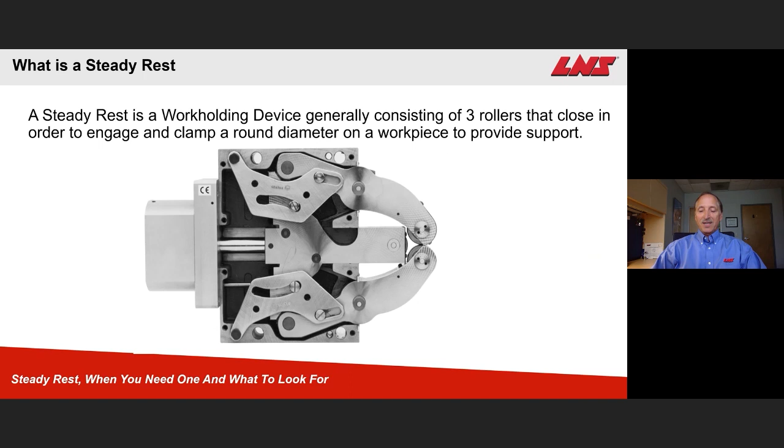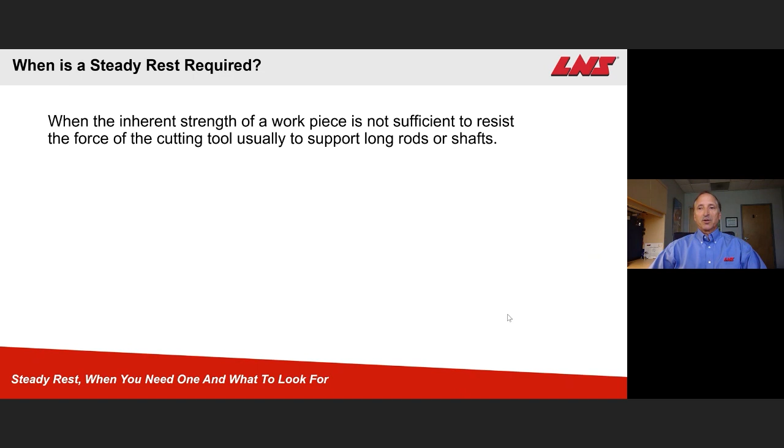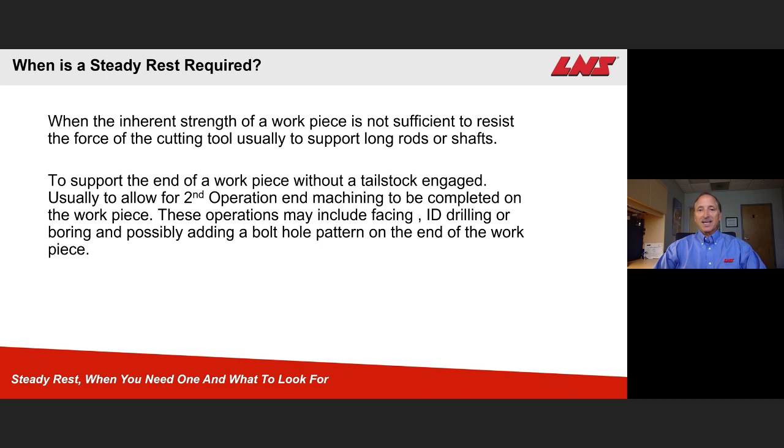When is a steady rest required? When the inherent strength of a workpiece is not sufficient to resist the force of a cutting tool, usually to support long rods or shafts. Also, to support the end of a workpiece without a tailstock engaged, usually to allow for second op machining to be completed on the end of the workpiece. These operations may include facing, drilling, boring, possibly adding a bolt hole pattern on the end of the workpiece.

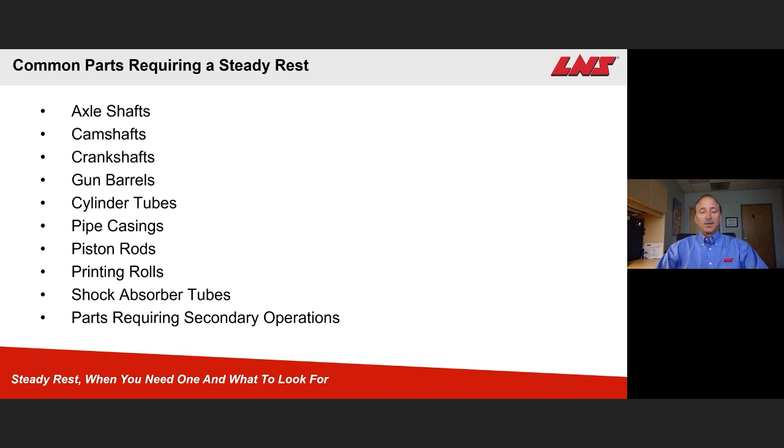Here's some typical common parts that might require a steady rest. Notice a lot of shafts, axle shafts, camshafts, crankshafts, gun barrels, going down the list all the way down to the last item, parts requiring secondary operations.

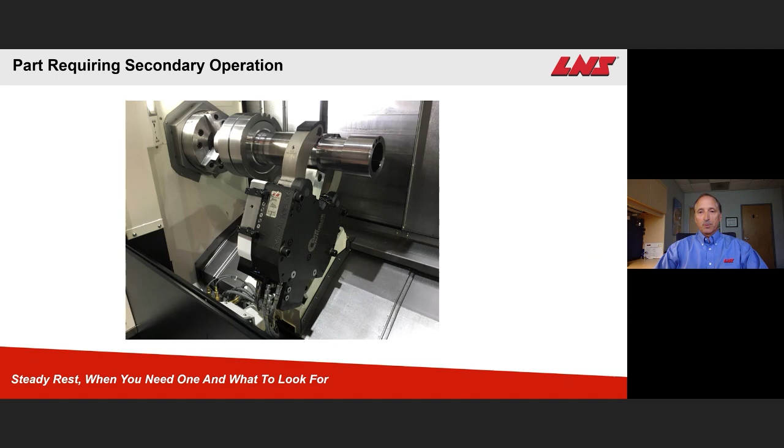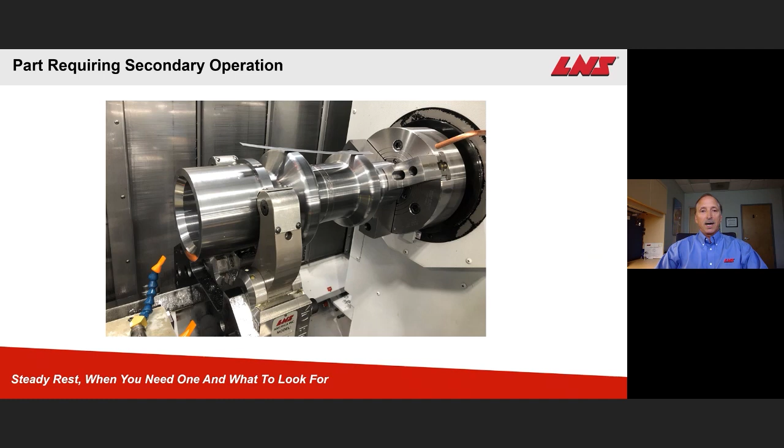Here's a part that might require a secondary operation. If you notice, the part itself is pretty robust and probably does not need a steady rest to do any of the OD turning, assuming that a tailstock was engaged. However, if we disengage the tailstock to do any of the end work, you can see the steady rest would be needed in order to go in and perhaps cut the ID chamfer, maybe do some ID boring or something like that on the end of the part.

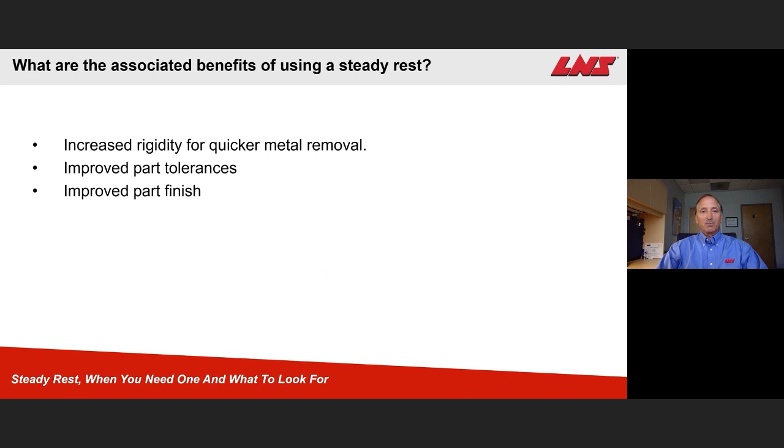Now we'll talk about the associated benefits of using a steady rest: increased rigidity for quicker metal removal, improved part tolerances, improved part finish, increased tool life, and improved operator safety. That is especially true when looking at those parts requiring the secondary operation.

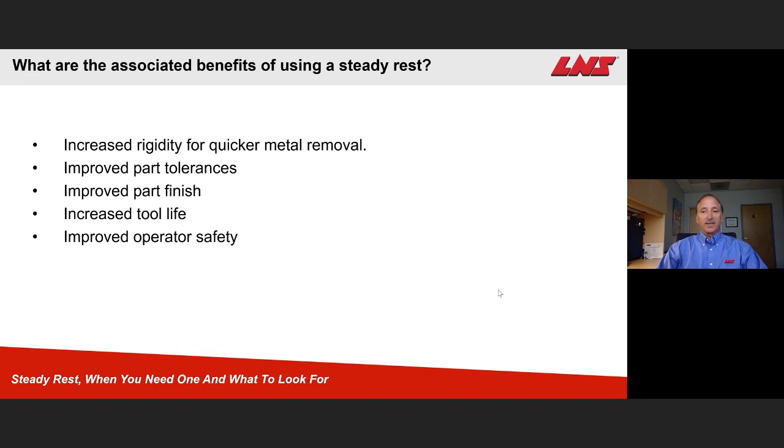So now we want to get in and talk about what types of steady rests are available. First, we'll start with the SLU Series steady rest. Those are multi-purpose for standard applications. They are available in both manual and automatic lubrication models, and we also have the side cylinder B models available for additional clearance.

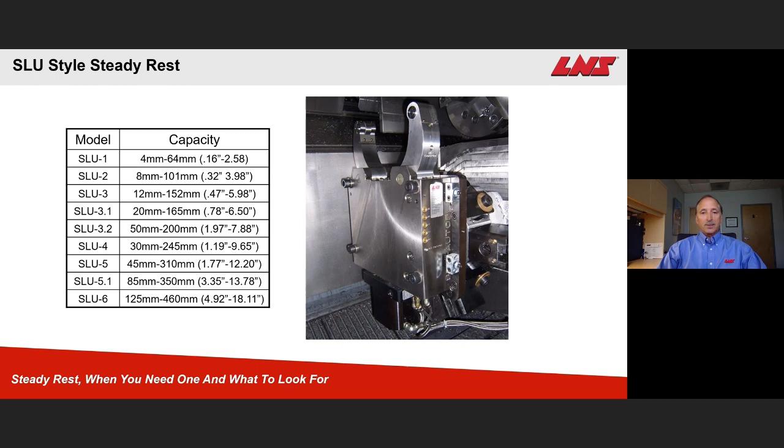Here's a chart that shows our common stock sizes of the steady rest in the SLU series. Notice that the smallest size goes down to about 2.5 inches, and the largest size that we keep as a standard is just over 18. There's a picture of what a standard SLU-Z series might look like.

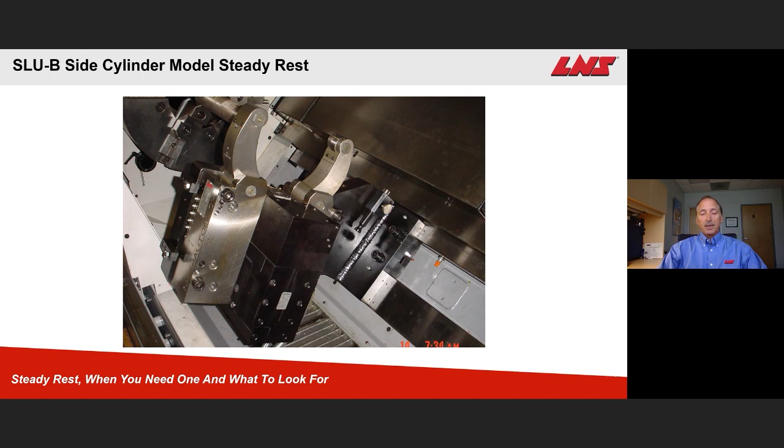And here's a picture of the side cylinder B model that we talked about. Now, if you notice in this picture, the cylinder is mounted on the end of the steady rest. However, in the B model, we take that off of the end and mount it here on the side, with additional linkage going through the body to work the middle arm and the outside arms of the steady rest, which might be necessary. You can see that if the steady rest cylinder was sticking out of the end, we could perhaps have interference with some of the front guarding, maybe even the front door of the machine.

The next model we have is the SR Premium steady rest. The Premium steady rest has the same mounting pattern and capacity as the SLU series. It has a fully sealed body, with coolant wash through the coolant guards at the 3 rollers. It also has hardened arms for greater wear resistance and durability.

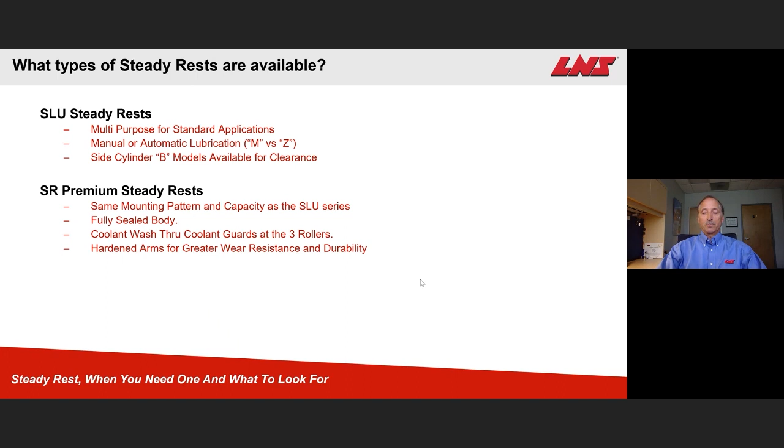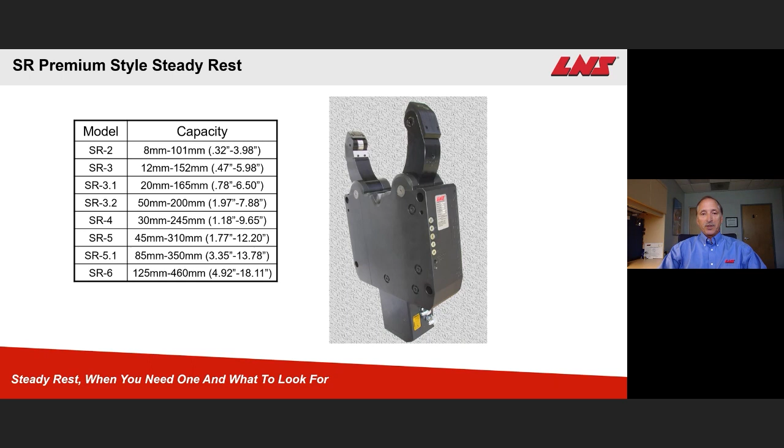Here's a picture of what a standard SR steady rest might look like, along with the different capacity sizes that we offer. Notice that we start in the 2 series — the 1 is a little too small to incorporate some of those features we've added, like the coolant wash especially. Here's another picture of one. The coolant port, by the way, that provides coolant to these coolant guards is in the back of the rest and ported through.

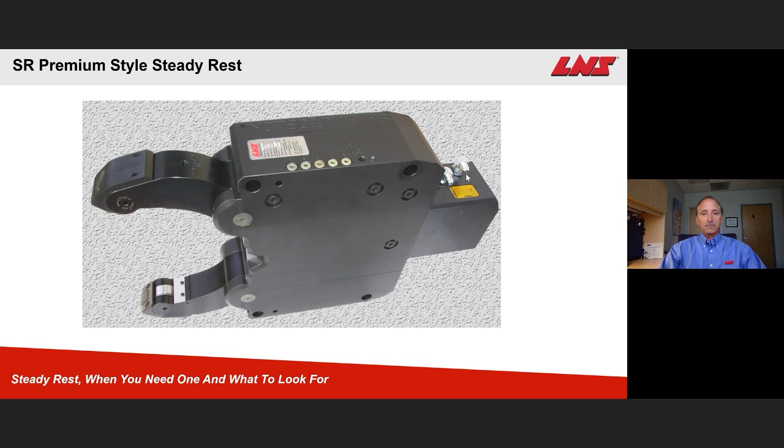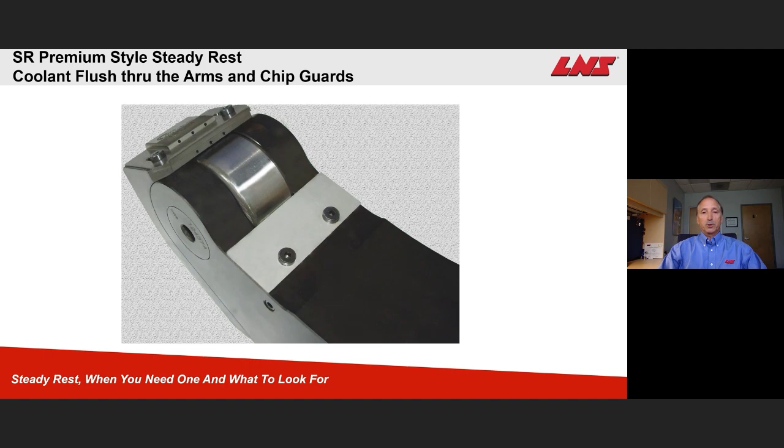This is a picture showing one of the coolant guards, and you can see the holes there. That's where the coolant would come out, the coolant flush. That coolant flush is very valuable for certain applications that have a lot of chips. We can keep those chips, flush them away so they don't go in between the workpiece and the roller of the steady rest.

Moving on, now we go into the K model steady rest. The K model steady rest is a compact design that allows for larger clamping diameter and smaller machine envelopes. It also has the coolant wash through the coolant guards at the 3 rollers.

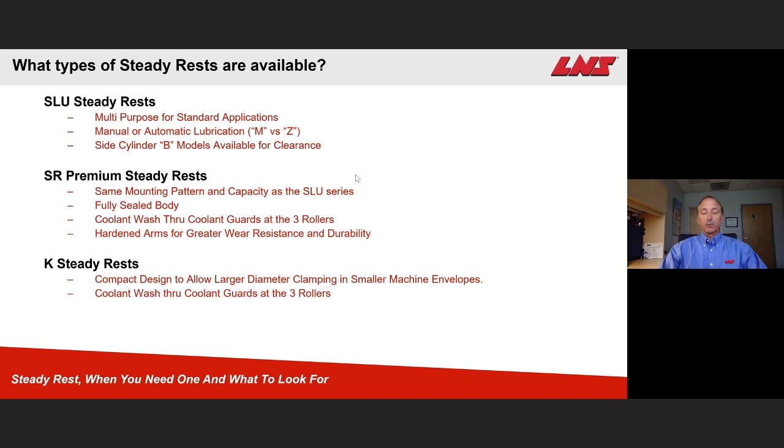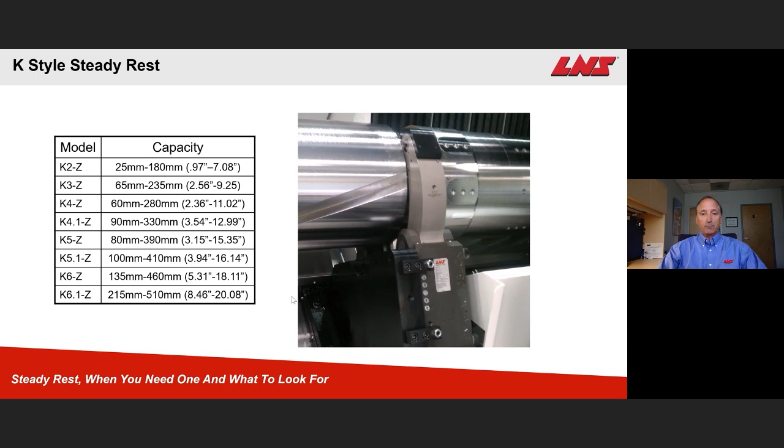And here you can see we start at the K2 series. Notice that even in the 2 series, we're getting up to 7-inch capacity in the K compact model, whereas the K6.1 is getting up over 20 inches of capacity. Again, that's a standard off-the-shelf steady rest. Here's another picture of one.

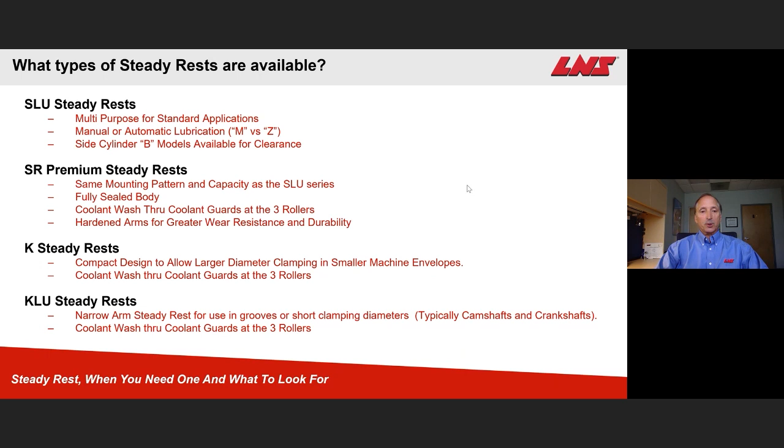So then moving on from the K-rest, we get into the KLU series. The KLU series is a narrow arm steady rest that's for use in clamping in grooves or short clamping diameters, typically camshafts or crankshafts. It also has the coolant wash through the coolant guards at the rollers. Here's a picture of them.

Now, notice you can see that the first 3 series or 3 steady rest options have the same capacity. What's changing is the arm width. Notice that in the model number, the 215, so it's a 2 series, and the 15 reflects the arm width. So we have a 15 and an 18 and a 22 millimeter arm width, all in the same series.

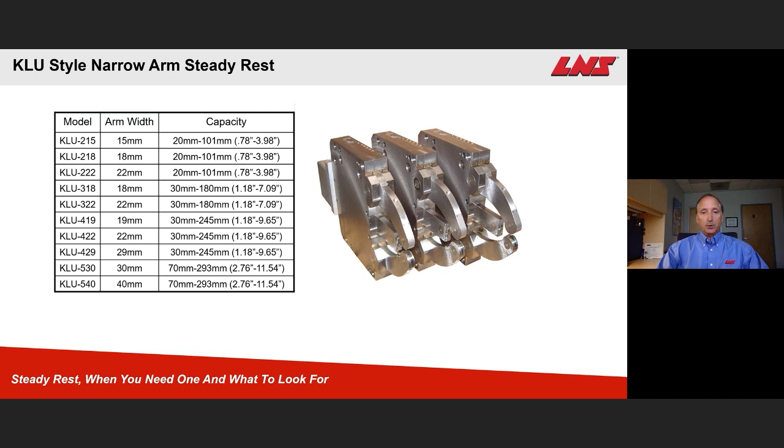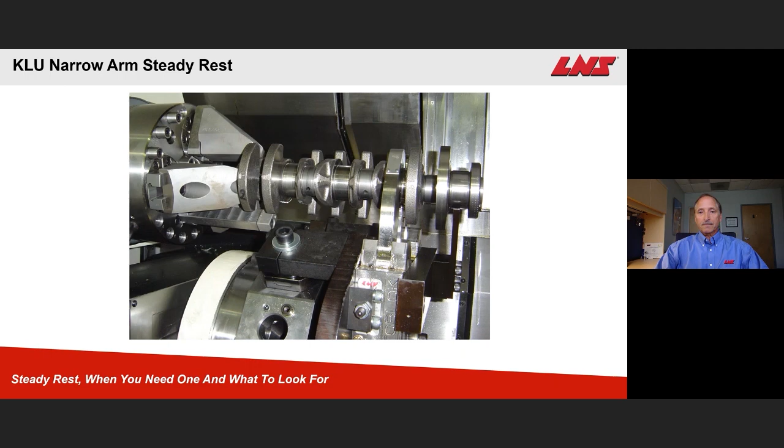The reason for that is we want to maximize the arm width in the groove or clamping area that we have. Obviously, the wider the arm, the more rigid it is. So we want to try to keep as rigid of a steady rest in there as we can. Here's a picture of a typical KLU application. Again, clamping on a crankshaft. Another one, you can see that thin area that we have to locate in.

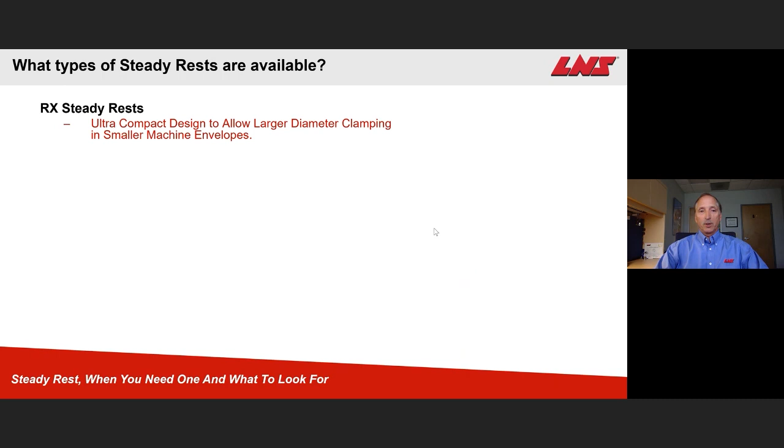So moving on, we get into our RX steady rest models. The RX steady rest is ultra compact in design. It allows for larger clamping diameter in even smaller machine envelopes. It also has the coolant wash through the coolant guards at the 3 rollers. And it is a premium style, so it includes the sealed body construction.

Notice in the RX, we start at the 3 size, and it has the capacity of up over 10 inches. And then we get into our largest model, the RX 6.1, and it goes up to 27 inches.

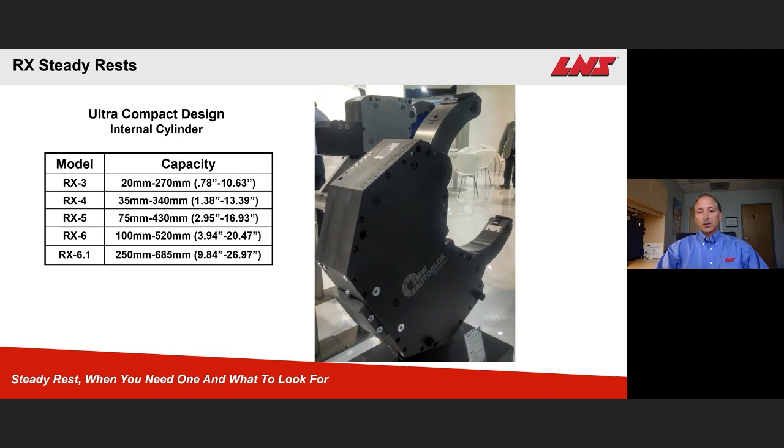Now, one of the ways that we're able to accommodate that inside machine enclosures is, you notice we talked about the cylinder on the end of the other steady rests. In this case, the cylinder is integral to the steady rest. It's actually built into the middle arm, and that's one of the ways that we're able to accommodate such a large capacity. A couple pictures of that. See the arms open up, 27 inches.

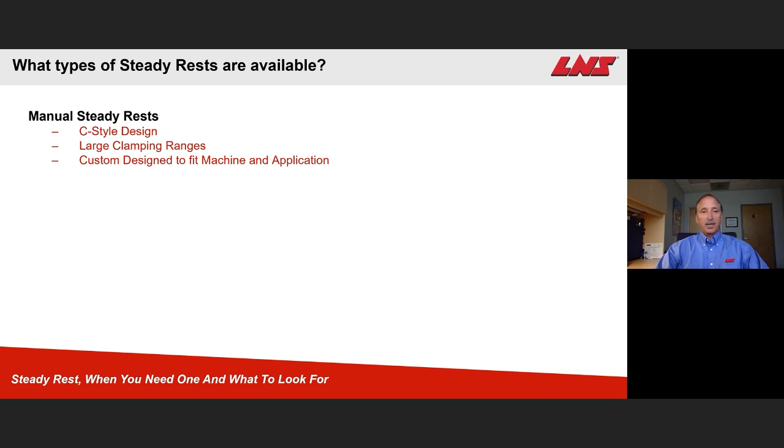So then we get into the last type of steady rest we're going to discuss, and that's our manual steady rest. Manual steady rests are a C-style design. They have very large clamping ranges. They're custom designed to fit machine and application. Here's a picture of one.

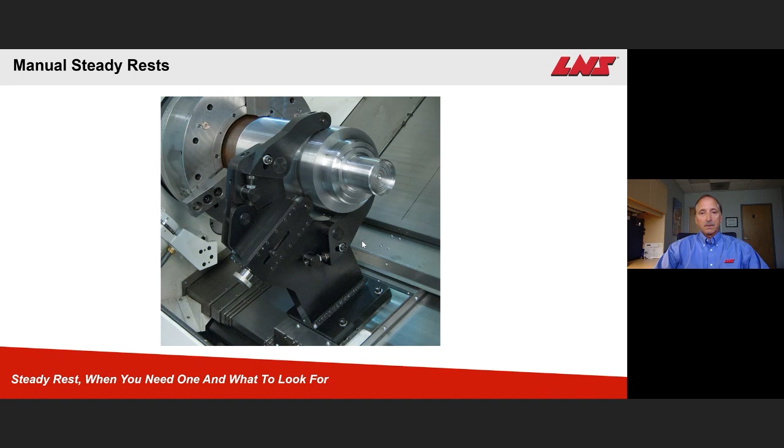And this is a good picture of another manual rest from the backside, and you can see how we've actually designed the steady rest to fit right inside the machine door profile to make sure that we've maximized as much capacity out of the manual rest as we can.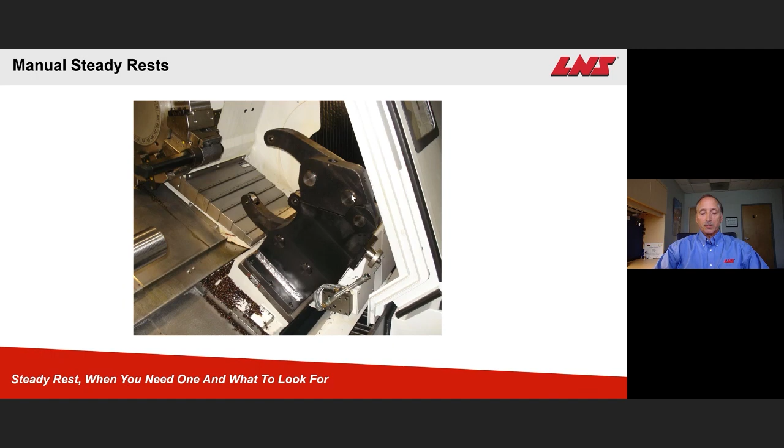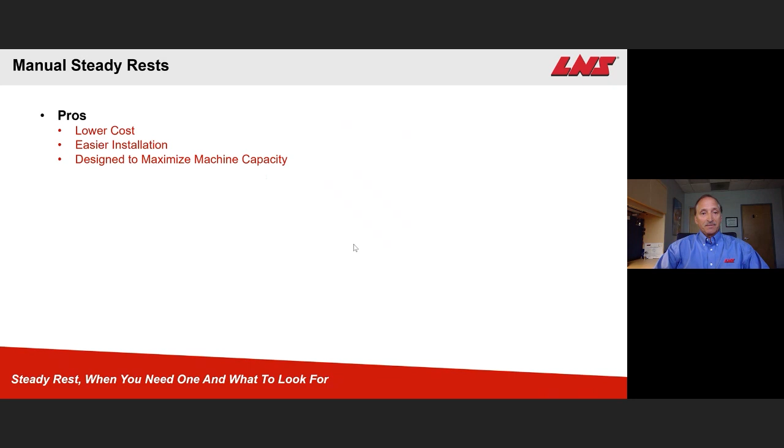So we talk about what are the pros. Well, it's a lower cost. It's an easier installation. It's designed to maximize the machine capacity. There's no special interface required for most applications.

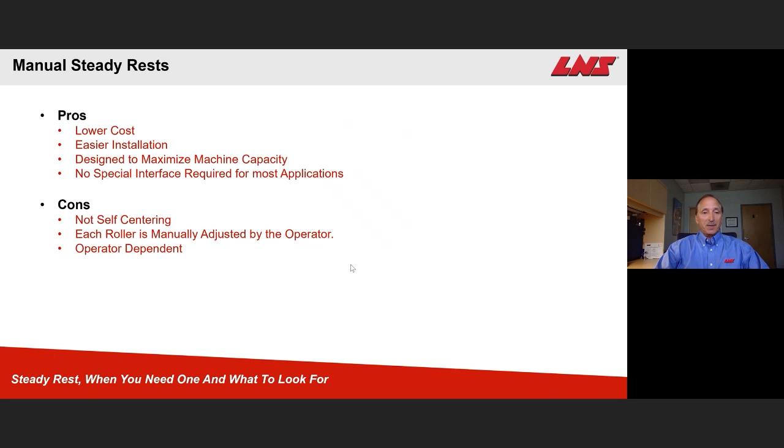The cons are it's not self-centering. Each roller is manually adjusted by the operator. It becomes very operator dependent, so you're going to get less predictable results. And we do not have an ability to automatically lubricate the rollers. They do have grease fitting zerks at each roller, but we can't automate that.

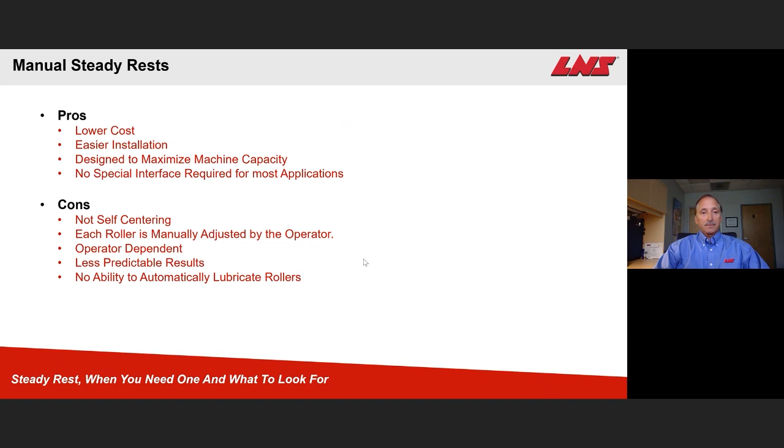So with all the steady rest styles or types that we just discussed, there are 2 different bearing styles available for each of those. Of course, we have the cylindrical or straight bearing that's used for most applications. It can be used for standard support on straight diameters, whether that be fixed or traveling applications.

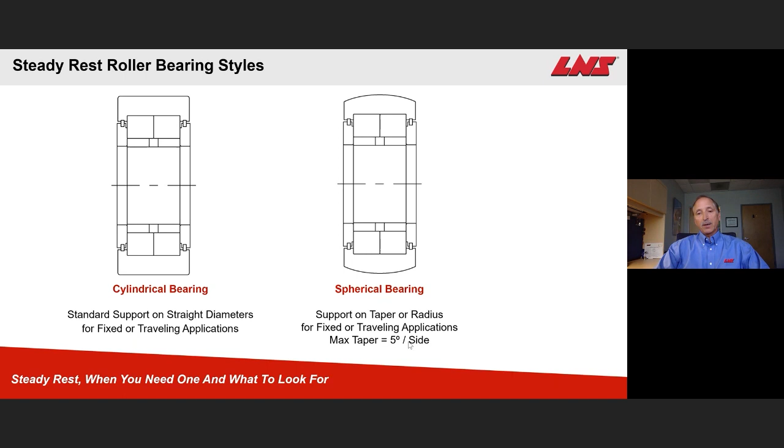And then we offer the spherical bearing. The spherical bearing, of course, is for locating on a taper or a radius, and usually can accommodate about a 5 degrees per side angle. They are also good for either fixed or traveling applications.

So here's an accessory for the SLU-X series. You noticed all the other ones we discussed had coolant guard options, not available in the SLU series. So one accessory that we have to help with chip control is our spring-loaded guard that has a brass wiper. That brass remains in contact with the workpiece for better chip control.

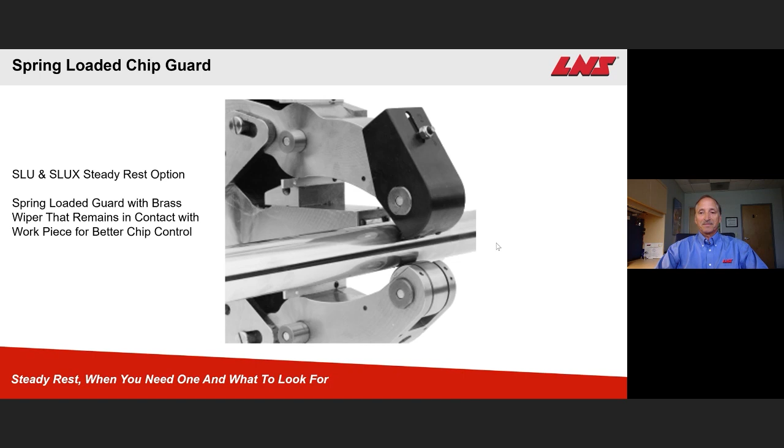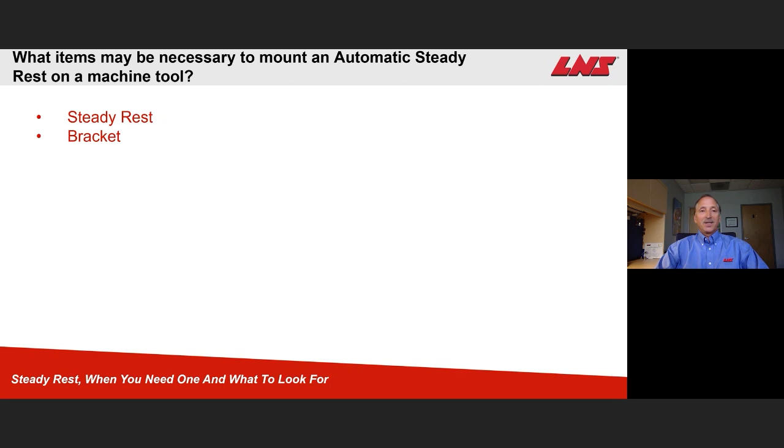So now we want to talk about some of the items that are necessary to mount a steady rest onto a machine tool. Well, of course, we have the steady rest itself, and then the mounting bracket, perhaps a base, whether that be manual or programmable, hydraulic valve packages, lubrication packages, way covers, whether they be manual or a telescoping design, hose tracks, the interface to the machine tool, the M codes, usually OEM provided, and of course the professional installation.

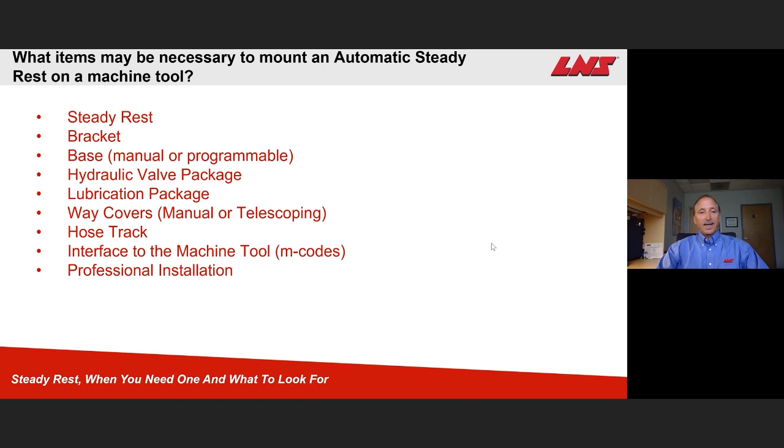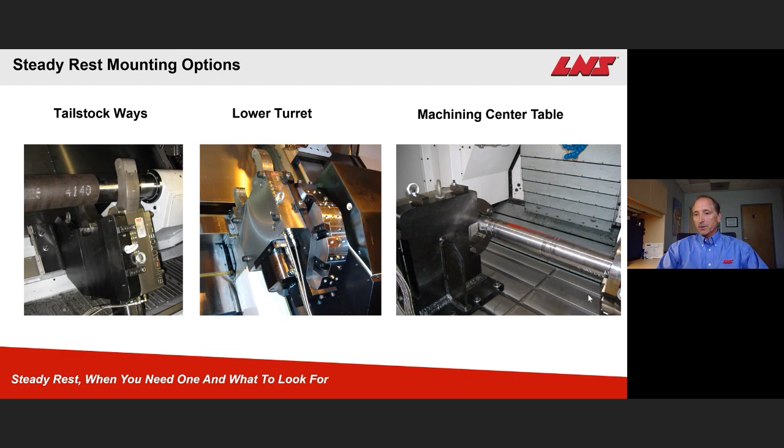And we can also mount on a machining table. Usually when we put it in a machining center, it bolts directly to the T-slot table, and it's used in conjunction with a rotary table that you can kind of see over here to the far right side of the picture.

So let's start talking about steady rest bases and brackets. Of course, the base can be designed to fit either linear or box ways. They can be either manually or programmably positioned. They have the ability to have an automatic or manual tow pin, and there are in-position switches available. We'll talk a little bit more about that in a minute.

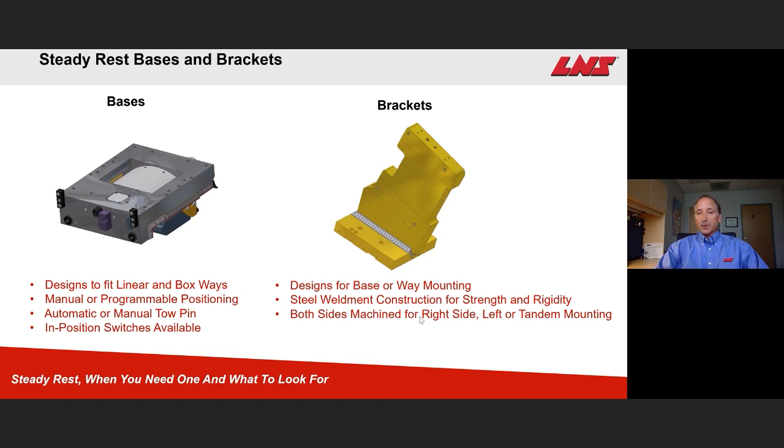So on the brackets, our designs are for base or way mounting. We have a steel weldment construction for both strength and rigidity. Both sides are machined for either right, left, or tandem mounting.

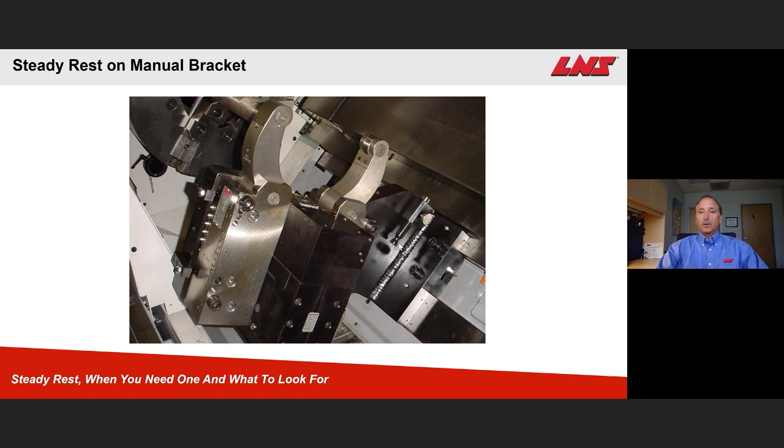Here's a picture of a manual bracket on a machine. Notice in this area, you can see these are the bolts that would be used to tighten it down to the box ways in this machine. This is what they call a manual advance latch pin. Let's see if we zoom in on that a little bit. This is a thumb screw here.

So this pin can be advanced forward and engage a U-block that would be mounted onto the upper cross slide. And that's how you would drag this steady rest up and down the tailstock ways on the machine. Once you get it into position, then you would manually retract this pin and go ahead and tighten up the clamp bolts.

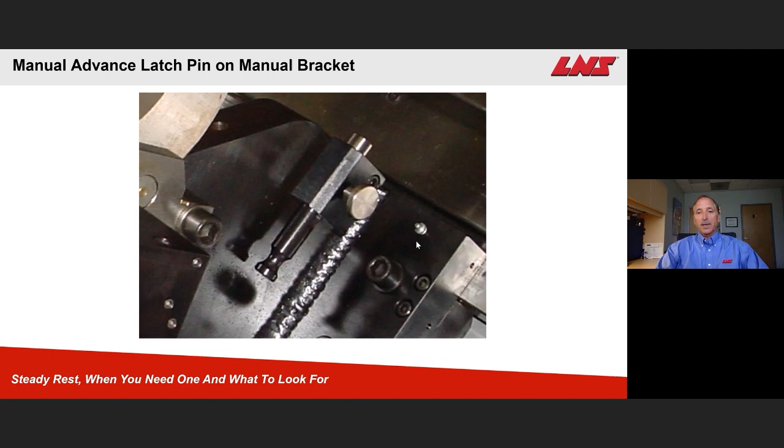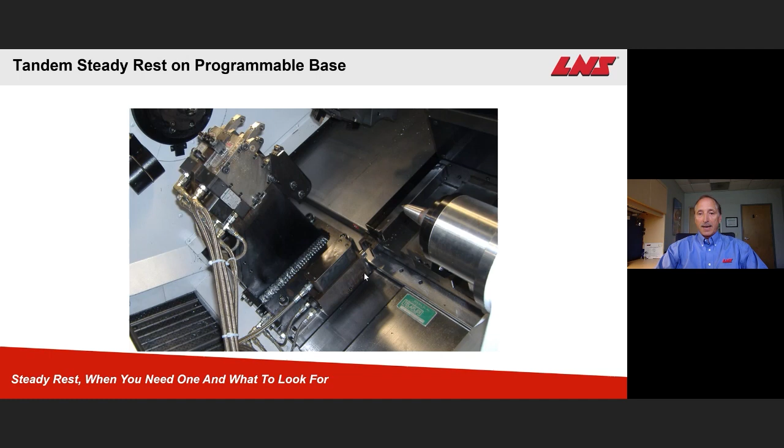So then we also have a programmable base, could even be a programmable bracket. This base is automatically clamped and has an automatic pin. Take a look at that up a little bit closer. We talked about the U-block in the previous picture. This is what it would look like mounted to the upper cross slide. And you can see this pin here is cylinder advanced and cylinder retracted.

So as the pin is advanced, the base is automatically unclamped. The upper cross slide drags it to the new position. And then at that point in time, the pin would be retracted and then the base would clamp back up. And then most importantly, the machine control has to then remember that location of where we dropped it off so it knows where to go back to get it.

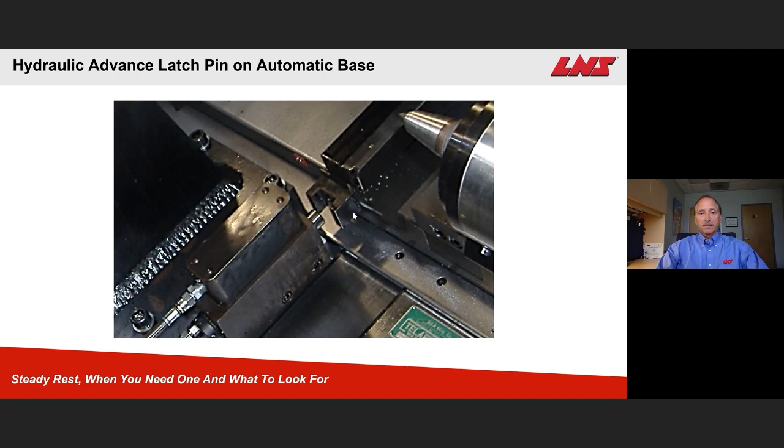So we also offer valve packages. That's the hydraulic solenoid valves and the pressure reducing valves. Also includes stainless steel braided hoses. And we usually put quick disconnect fittings on all of our installations. And that's to aid in getting the steady rest in and out of the machine quickly.

The lubrication units we offer are fully programmable units, and that's to provide the proper lubrication for the rollers and internal wear surfaces of the steady rest. And it also includes both low level and pressure loss alarms.

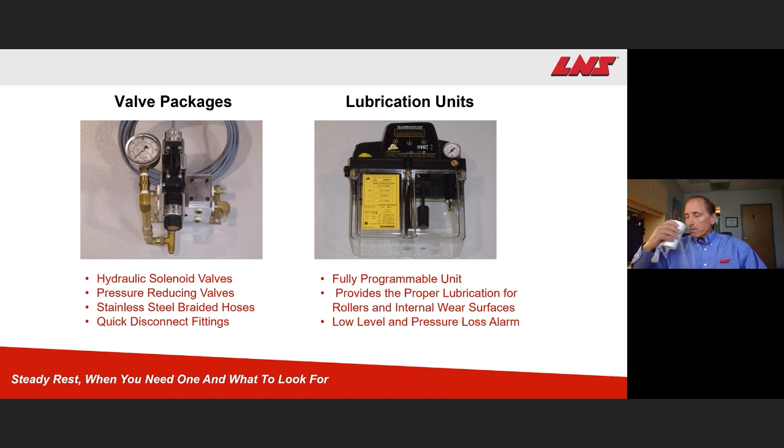Other accessories that we provide for some installations include telescoping covers. Telescoping cover is to provide protection for ball screws and perhaps linear guideways on the machine. And then hose tracks are available also for some applications. We use these to protect the hydraulic and electrical lines, used mainly for automatic base applications.

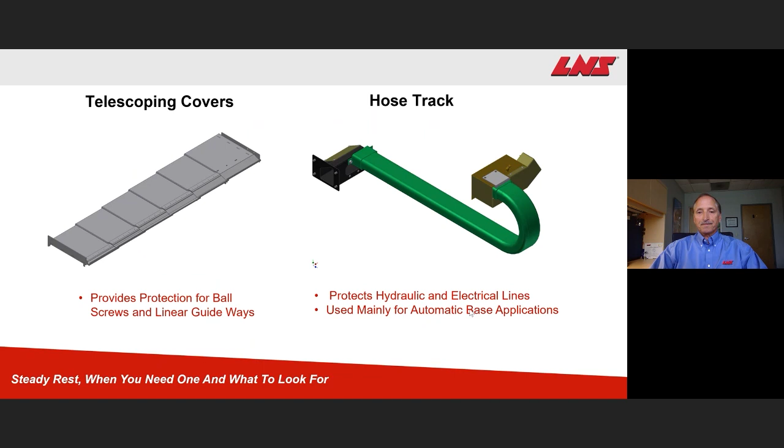Here's some tips and tricks for getting the most from your steady rest. First of all, always ensure that the steady rest is properly aligned to the machine spindle center line. Now, our service techs will do that on site. That's one of the final things that they'll do during an installation. And hopefully you have an operator or a maintenance person around that's available to be trained before he leaves the building. We always want to make sure we use the proper type of lubrication, which is ISO 46, at the correct intervals. That's for both the steady rest and the rollers.

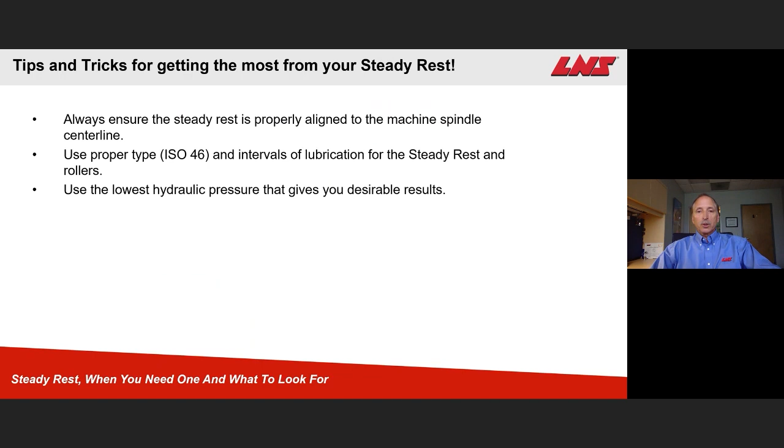We always want to use the lowest hydraulic pressure that gives you desirable results. The reason for that is there's no reason to put additional load onto the roller bearings themselves than what's needed, because that will shorten their life.

We always want to turn the part prior to engaging the steady rest. We want to turn the steady rest band in an area where we can get a good round diameter that's free of chatter. You might need to start a little closer to the headstock or to the tailstock and then work your way to the center of the part. You do not want to engage the steady rest on a part that's rotating at higher speeds, as this can develop flat spots on the rollers. And also, you always want to ensure that the steady rest rollers and chip guards are in good working condition.

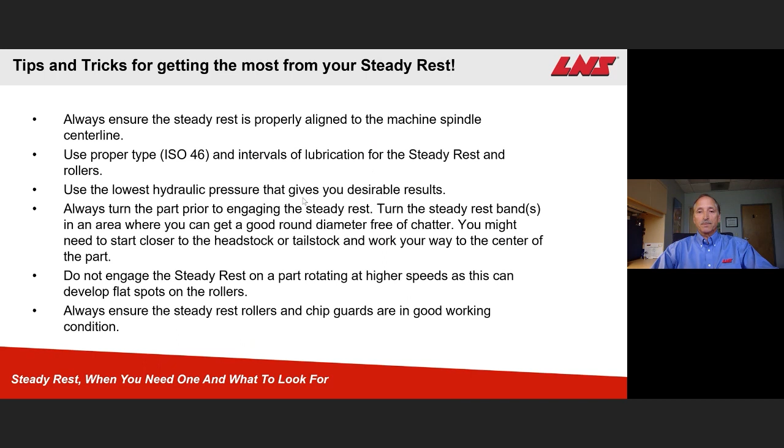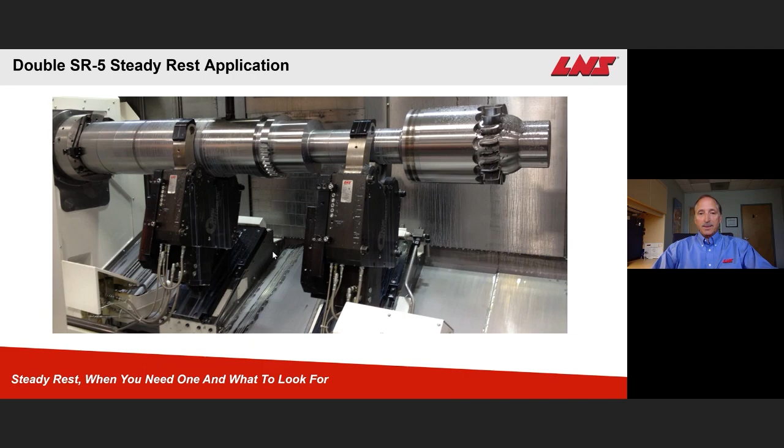Let's take a look at just a couple applications. Here's what we call a double steady rest application. Notice these are SR5s. You can see the coolant guards up here. Each steady rest is mounted onto its separate bracket and a separate base. That's the reason why we would call it a double.

A tandem, such as what you see in the picture here, is a single bracket with the steady rest mounted on both sides of that bracket in tandem. You can tell by the number of lines here that each of these steady rests can be activated independently of each other. And then this is where the lubrication and the air lines are teed together.

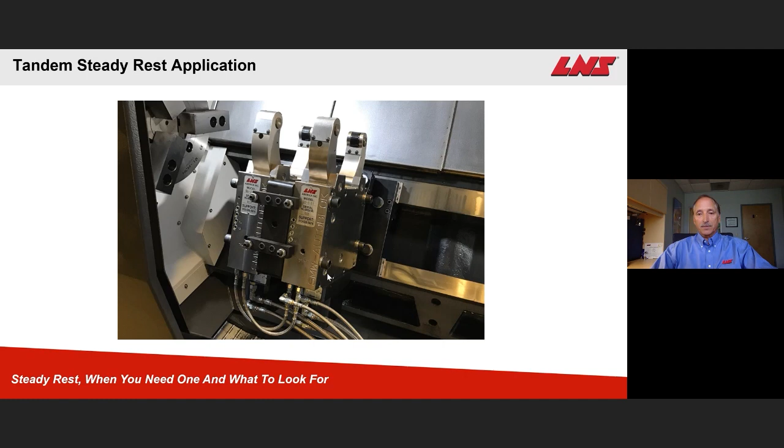Here's another tandem steady rest application. And this is a really good picture to talk a little bit more about what we had mentioned earlier, and that's about turning a diameter that's round and true prior to engaging the rest. You can notice here that we've got quite a bit of chatter in this area. So we don't want to engage the rest on that yet, because if I do, it's extremely likely that as I machine anywhere else on this bar, I will see that same amount of chatter or marks in the part.

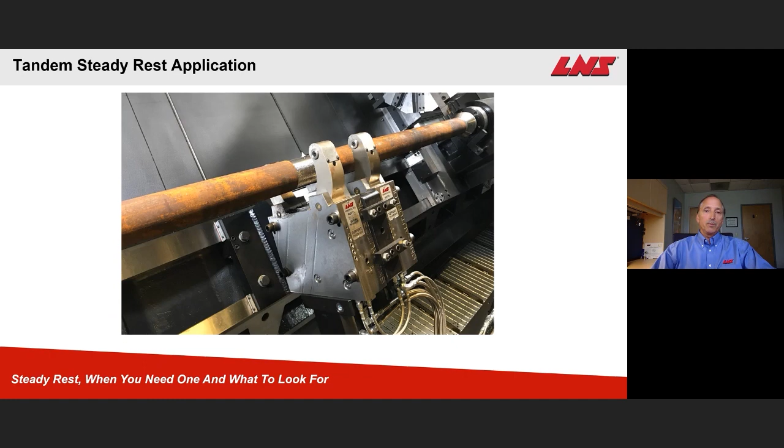So a much smarter thing to do is to move away from the center of the part, closer to the headstock or the tailstock, and machine over here where I can get a good round diameter, clamp on it with the steady rest, and then move back closer to the center to do additional machining.

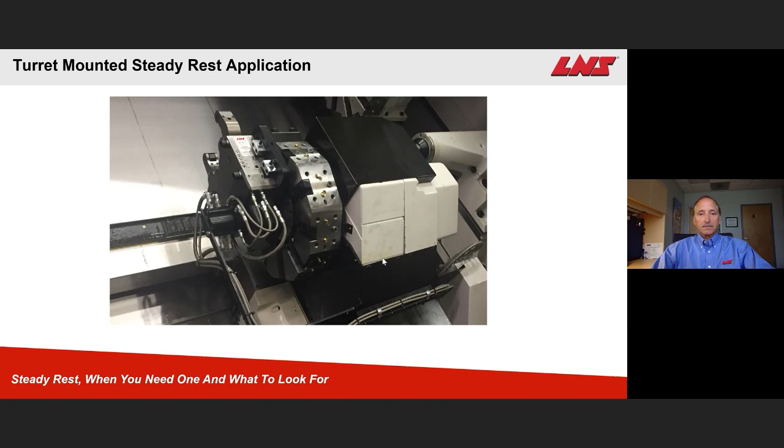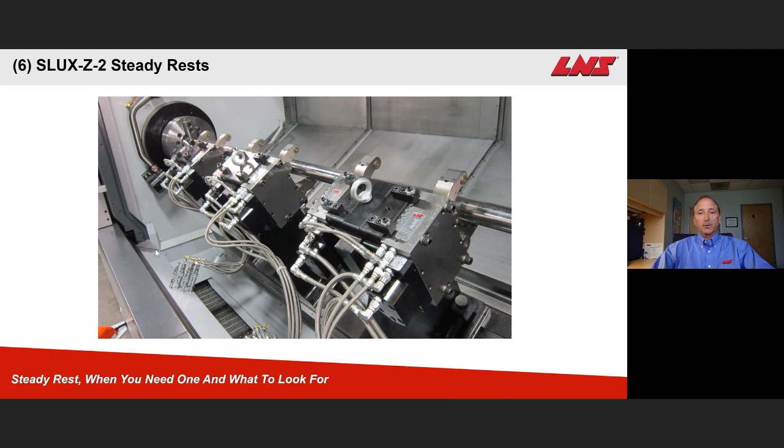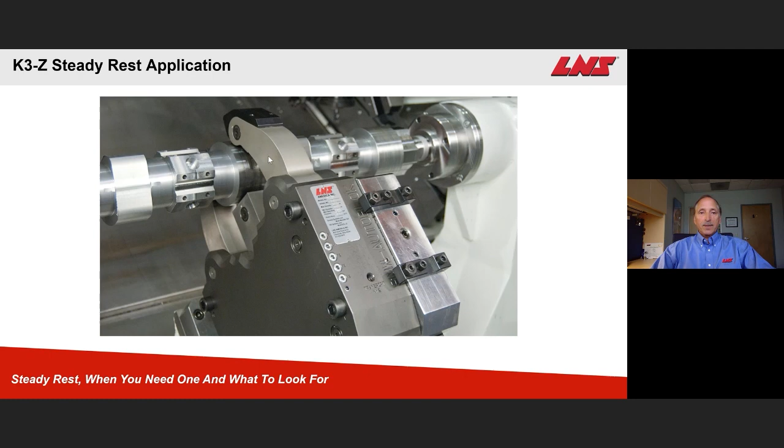Just another tandem steady rest application here. K3 steady rest. Again, K models also have that coolant guard on them.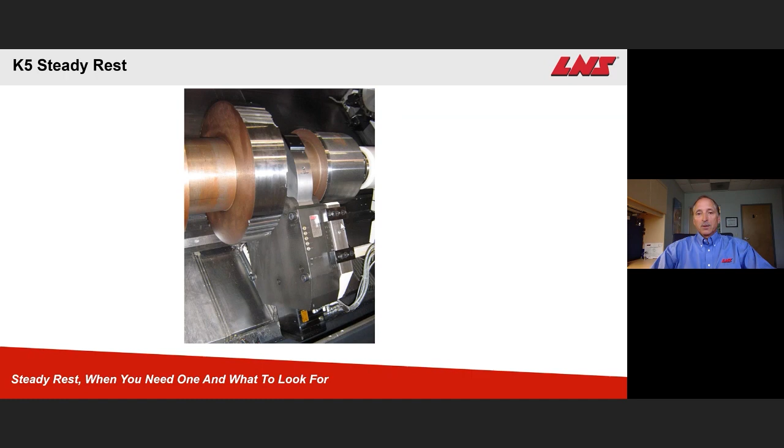This is an interesting picture. It again shows the reasons why we machine both sides of our brackets. In this case, if the steady rest was mounted onto the other side, and that was the only option we have, it's very likely that this very large diameter of this part would be interfering with the bracket. So we needed to have the ability to put the rest on the left side.

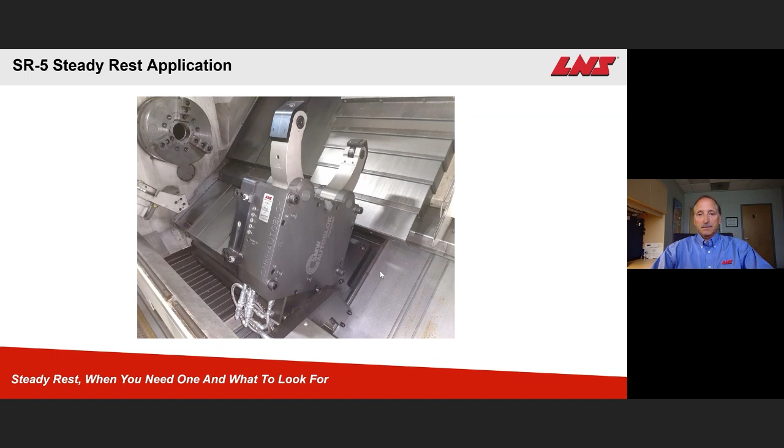And there's just another SR5 steady rest application, base mounted. Double steady rest application. You can see in this area that we have yet to put in the telescoping way covers that are going to be needed. This is a ball screw down in this area, so that needs to be protected. And that would be the final part of this installation.

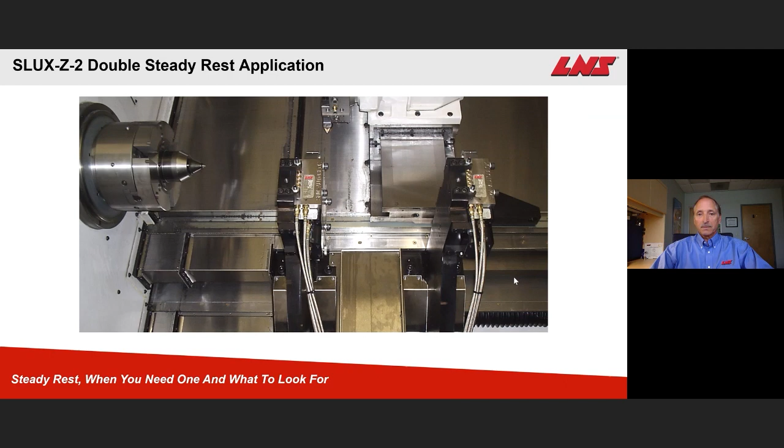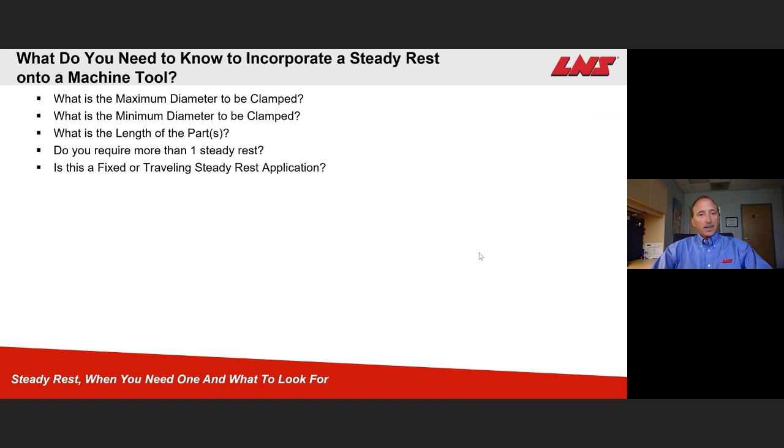Is it going to be a fixed or traveling steady rest application? How is it going to be mounted in a machine? If it's tailstock mounted, is it going to have manual or automatic positioning? If turret mounted, do we need to worry about index capability?

Is the steady rest going to support a straight and/or tapered part? The reason why that's important is so we know what bearings to put on the steady rest before we ship it. And it is possible to switch back and forth too. So if we have straight parts, you may want to use a cylindrical bearing, and then when we go to a tapered part, that would be a good time to switch over to the spherical bearings. It's very easy to do.

There could either be manual greasing or automatic oil lubrication. We need to make sure that the steady rest interface is available from the OEM, extremely important. And we need to make sure that's installed and operational prior to us getting on site for installation. And then finally, do you have any special delivery requirements?